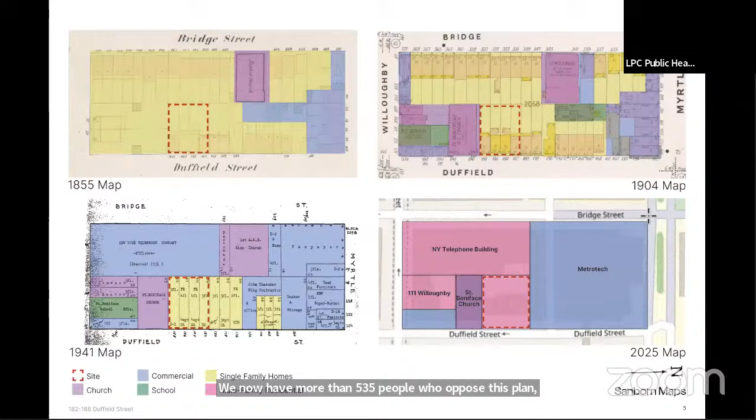The original preservation of these homes began at the behest of the community board at the time, which led to an agreement signed in 1988 between Metrotech developers, the city, and state, which stipulated, quote, the houses should be occupied for institutional, commercial, residential uses that are compatible with its physical and historical integrity and protected from future alteration or disturbance.

And now the community of downtown Brooklyn is demanding that these historic and irreplaceable Duffield townhomes be protected as intended when they were first deemed architecturally significant, saved from demolition in 1990, moved and preserved intact at considerable expense, and subsequently individually landmarked by this LPC in 2001.

Our three major objections are: the current plan violates the townhome's original landmark designation. In fact, it significantly alters the facade of 188, including the historic entryway, removing the stoop, destroys the rear portion and all the interior floor plans of the houses, rendering them mere Hollywood set facades, destroying any sense of their current landmark status as habitable, potentially habitable townhouses.

The plans as presented omit important engineering details surrounding how the developer would protect the townhouse's existing delicate original details in wood and brick structures during large-scale construction on a small lot with limited egress, without their complete and permanent destruction. The current plan does not honor the history of these homes, nor the reason for which they were saved in the first place: to commemorate the vibrant middle-class neighborhood of downtown Brooklyn and its rich historical importance in the development of 19th century Brooklyn.

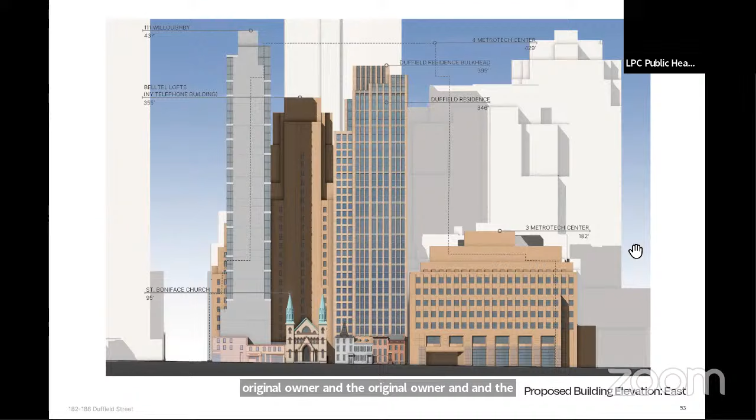That never happened. We're now here many years later with a couple of owners between the original owner and the current owner. But that was never filed. It was not only against that building, but nothing was ever filed against any of the buildings.

Landmark designation did happen. I did reach out to the SHPO and the law department. We talked through some of the issues, and based on all those conversations, since they weren't filed, it's very difficult, if not impossible, for us legally to enforce a restrictive covenant against 186.

The current owner would have to agree to it. More importantly, these are very old covenants. There was some question about how this project relates to those covenants in that project, but more importantly, landmark designation, which was identified as an equal avenue for preserving the buildings, did happen in 2001.

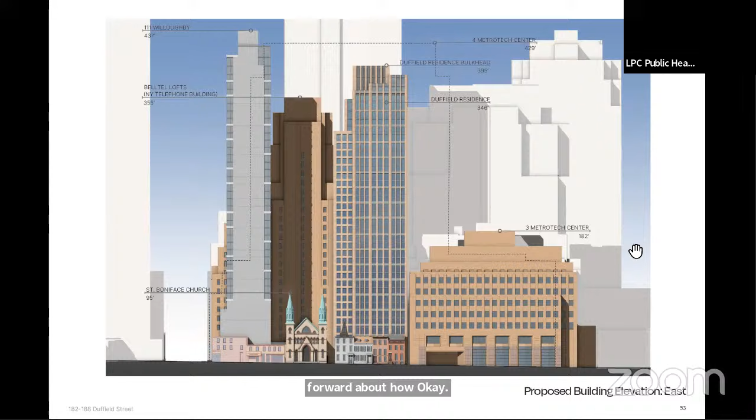And based on those conversations and where we are today, the landmarks preservation law is the one that we will be applying today and going forward about how to analyze the proposed changes to these buildings.

Thank you. Commissioners, do we have any final questions? Okay. Let's go ahead and close the hearing.

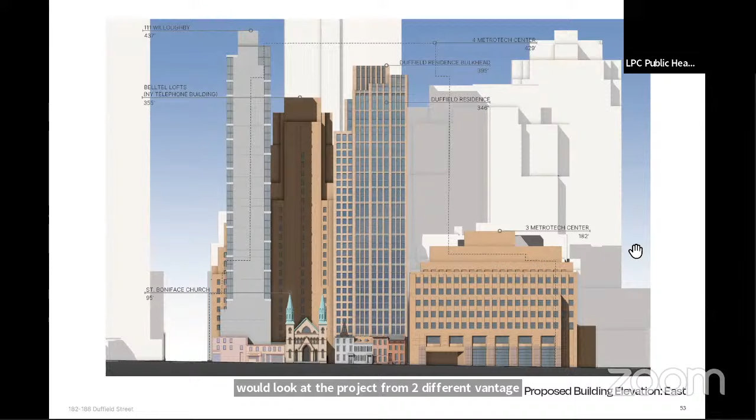I think the project has to be looked at from two different vantage points: from the vantage point of those precedents, and from the vantage point of what we do every single Tuesday with townhouses all over the city. And those are in districts, not even individually designated. To some extent, well, let me go back.

In terms of the precedents, they showed I think 4 precedents: the Coty Building on Fifth Avenue with the KPF Tower behind it, the Fifth Avenue Madison Square area building, the Greenwich Street building, and the 14th Street BKSK project. I don't think any of these are relevant to this case. I think in all 4 of those cases, the buildings were sited on a corner, and in 3 out of the 4, the large buildings were set back significantly enough so that either they didn't touch the building, or they left the reading of the volume of the building significantly intact.

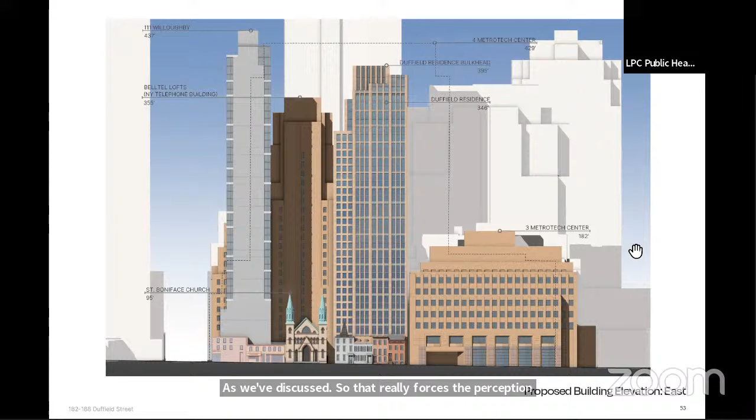Because this site is a mid-block site where the historic buildings are already bracketed on either side by buildings that are taller and behind, they sit in a hole in the city, a significant dark hole. And they are viewed relatively frontally because the buildings to either side are closer to the street, as we've discussed. So that really forces the perception of this project to be frontal, and there's no question that the frontal reading of this proposed volume would completely overwhelm the historic buildings. I just don't see a way around it.

Another concern I personally have, that I raised at the time with the 14th Street buildings, which I think every time I walk by it, I think I was right, but that's probably something a lot of people do, is I think there's a typology to how the city is built. The city is built primarily as blocks with buildings on the edges and a hole in the middle, and that keeps the mass of most buildings to the edges, to the perimeter. When you plunk a tall building in the middle of a block behind other buildings, like the 14th Street one, I think it just looks wrong.

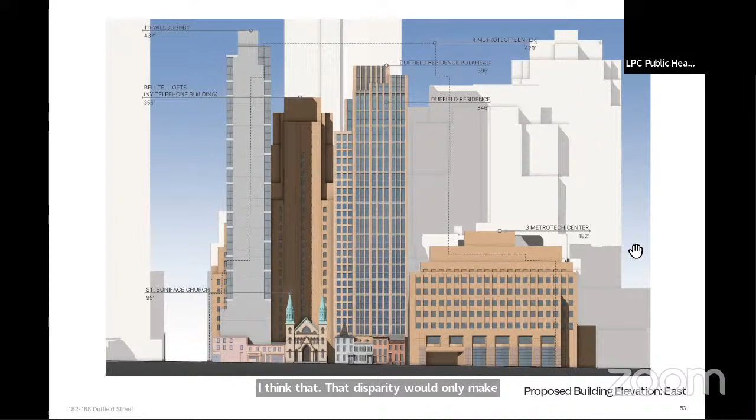I think it looks wrong from an urban development pattern. And I think this would look similarly out of place, even on what is actually a quite small block that's not typical of New York's kind of grid. I think that disparity would only make it more noticeable. So I think the volume of this building is way too close to the street and overwhelms the historic buildings.

I think from the vantage point of individual landmarks, if the precedents don't hold up, then you have to look at what else we normally do with buildings of this scale. And the answer is we make people crazy to get rid of the visibility of the top of a roof. This is a notably visible rooftop addition on 4 historic buildings, to the extent that the real analogies don't hold up here. I mean, you can think of other analogies, but this just doesn't hold up in terms of the precedents. So I don't think it's an appropriate solution.

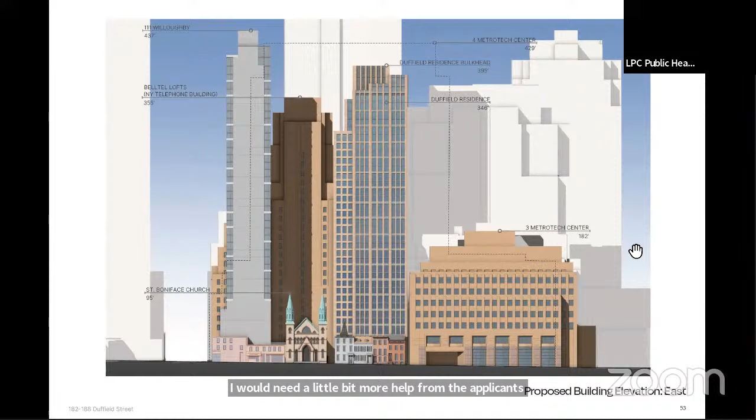Furthermore, not that it's necessarily relevant to our deliberations, but I found the applicant's answer to the question about why you couldn't redevelop these at a lower scale completely unsatisfying. The fact that 10 years passed and nobody did it—there's all kinds of reasons why that could have happened that have nothing to do with the intrinsic value of these buildings as potentially sellable real estate. So I think I would need a little bit more help from the applicants to understand why this Hail Mary desperate affair must be the only way to develop these properties and save them.

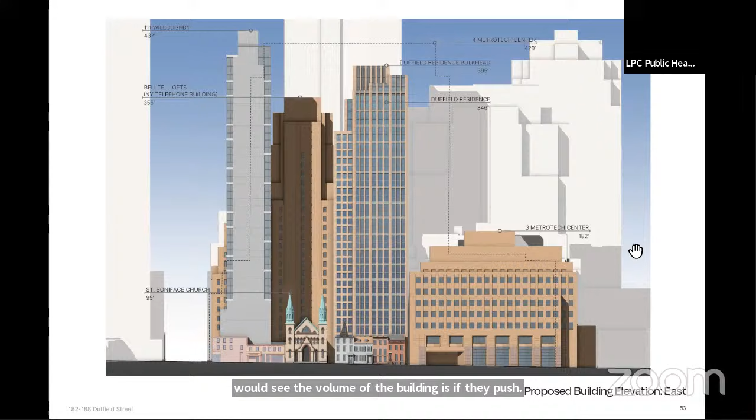The only way you would see the volume of the building is if they pushed the historic building up front, and when you went inside you saw the back view of the building. That also seems odd, that you would penetrate a building to see the back of another building. So the manipulation of the historic building in relationship to the tower needs to be rethought.

Thank you. Commissioner Chu?

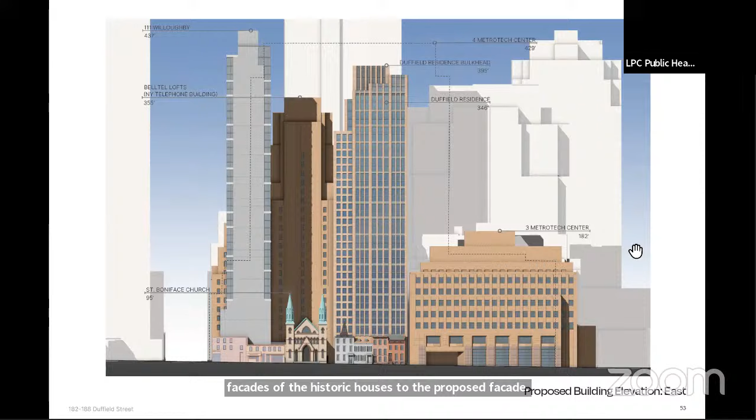I'm in agreement with my fellow commissioners' comments. I do think Michael's comment about the frontal reading of this combination of structures, the historic and the proposed, is really significant, because the proximity of the facades of the historic houses to the proposed facade means it doesn't read like a building behind. It reads literally, as Michael put it, as an addition on top.

In fact, in the section, it shows the addition coming up over the houses. That is not something we would ever really entertain, only in special conditions would we ever see that. But this is a case where the addition is in fact 20 times more than the actual existing fabric.

I also wanted to echo Everardo's comment that it's a very unique site. It has a history of many changes in zoning, which make it an unusual property to propose a solution onto. I recognize that as a challenge, but as an existing property that has had the historic houses specifically protected and moved here to be saved, any solution needs to celebrate those houses and work with them in a way that makes the proposal and existing fabric a win-win. Unfortunately, that's not what I'm seeing in this proposal.

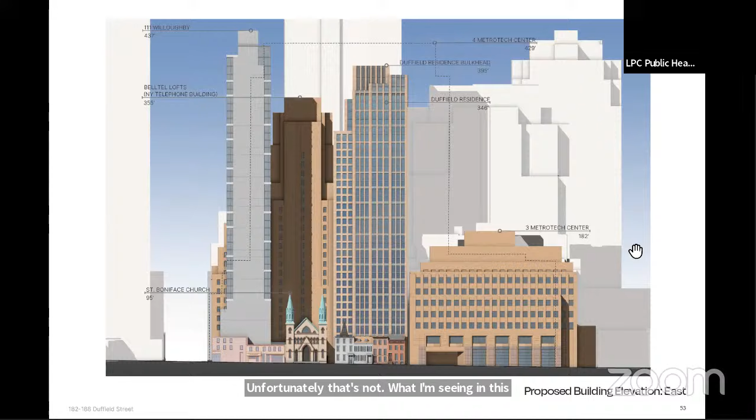The houses are diminished severely in scale with the proximity of the tall tower. There's so much demolition it's hard to tell what is left of the fabric of those houses. The rear is being removed, the roof is being rebuilt to be fireproof, many of the floors are being taken out and re-put in, and party walls are being affected, which are really the structural walls of the houses.

The front and back facades are freestanding. Those could theoretically be protected, but there are also revisions to the front facade as well. There's just too much, and at the end, too little left of what was to be protected on the site. I'm finding the proposal difficult to find appropriate at this point, as it is proposed.

Thank you. Commissioner Ikumbe?

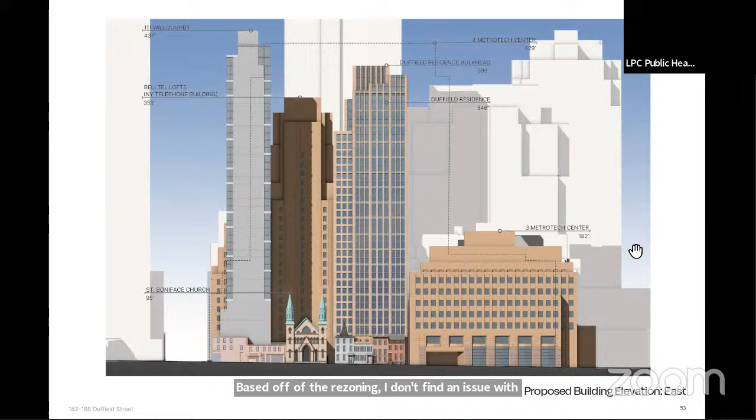Based off of the rezoning, I don't find an issue with the tower. The issue I'm actually having is that the tower trumps the landmark site, and it's kind of eating it, more or less. It pulls away its importance. I think we should recall its importance, given it was actually preserved once before and moved in the 90s, and find that to be a relevant portion of this site.

What's being proposed alters the existing landmark properties immensely, and it eats away at it. I appreciate the attempt to preserve as much of the front-facing facades, but I think that might actually be one of the easier things to do.

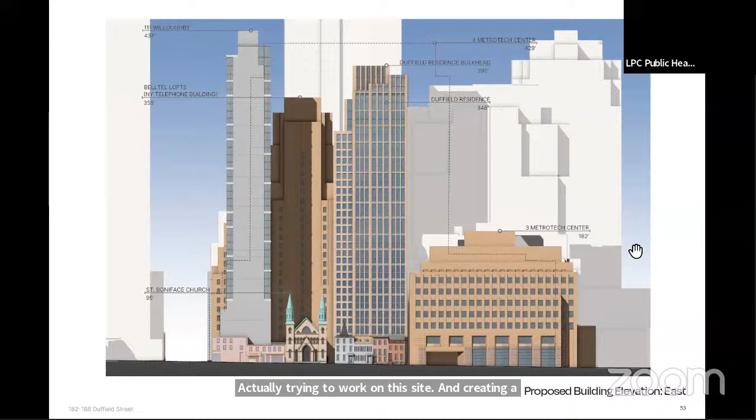Actually trying to work on this site and create a final product that seamlessly puts together all the wants in the basket is extremely difficult on this site. What makes it even more difficult is that the landmark buildings have to be put in the forefront, because that's why we're here in the first place. So I find the extremely high alteration of the existing properties to be inappropriate.

Thank you. Commissioner Wilder? Thank you. So...

The first thing I looked at when I started looking at the project was the 188 Duffield entrance. Just before going inside or looking at it, I wondered why this was changed—what was the reason? Obviously, I'm thinking about ADA access.

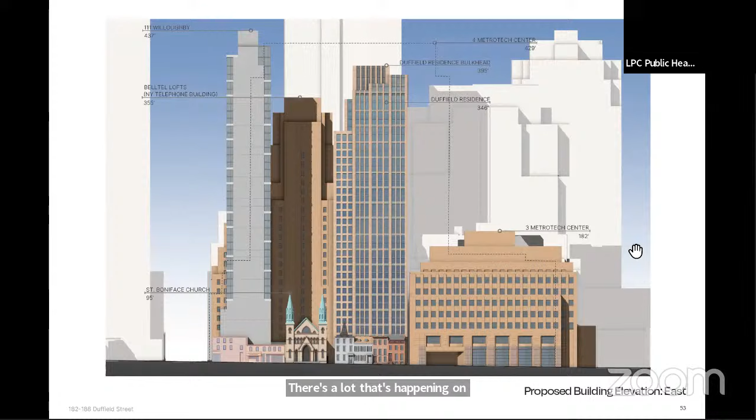But then once you start unraveling and looking into all the decisions made to accommodate this, there's a lot happening on the interior that subconsciously tells you this building is losing a lot of its history to make something work.

And that something ends up being this tower, which, as has been said, takes the lead in this project and becomes the priority versus the four buildings being the priority. And I think overall that starts to become the theme, which makes it difficult to say that you're preserving this building. Again, I probably don't have an issue with the tower as a separate entity.

And I looked at it and thought, well, what happens if we pulled the buildings forward, which was discussed and also shown in the appendix. But then I think the essence of these homes is the fact that they are set back, and they create this unique feel in a very dense area.

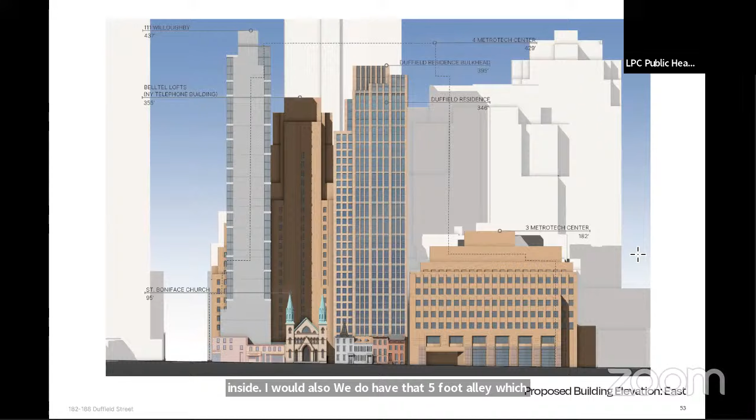So what's the next thing to consider? Should the front wall of the tower be pushed back to maybe empower the townhouses in a sense? I think overall there needs to be more work to find that balance, because at the moment there's too much happening inside. We do have that five-foot alley, which could also be used as some sort of entrance to address the ADA, so we don't have to change that facade as much if we're getting into the weeds. But I think there's too much happening to be able to find this appropriate.

Thank you. Commissioner Ginsberg? Yeah, so when I started looking at this and went and visited the site, I want to be supportive of housing because we need more housing. And it's a very strange environment where these three-story buildings are surrounded by really tall towers, which is not at all what their original environment was.

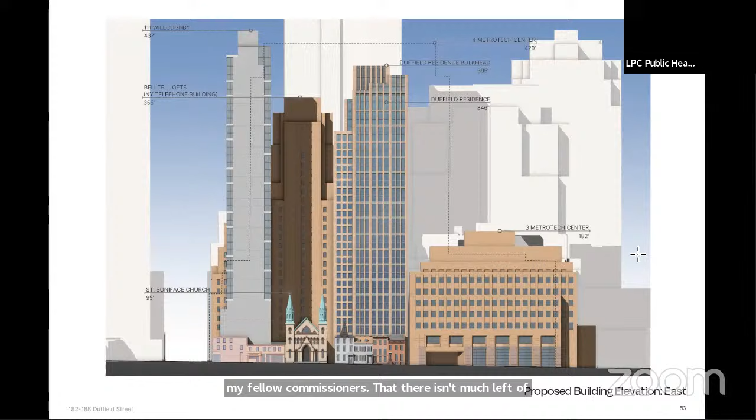But I have to agree with my fellow commissioners that there isn't much left of these buildings, of the historic fabric, et cetera. That is why they were landmarked and why they were moved and preserved. I'm not sure it's possible to build the tower and do that, but this doesn't. So sadly, even though I'd love to see the housing work, I can't find this appropriate.

Thank you. Commissioner Mahan?

So I'd like to begin, first of all, by thanking the applicant team for their ambition. I'd like to thank them for coming up with a creative way to activate some landmarks that are in a very challenging condition. This is a challenging context. And I think a lot of people here want to see development, want to see the production of housing. Many of us are not afraid of height.

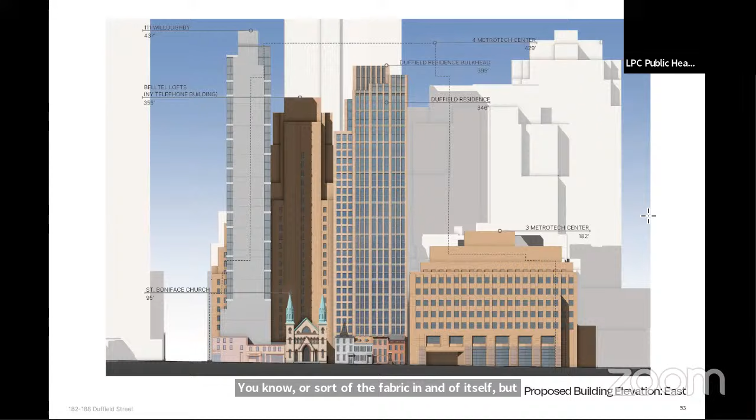So that being said, for me, this is not so much about the rear facade or the fabric in and of itself, but rather the relationship of the buildings to the surroundings. And I think the commission regulates the spatial relationships, the negative space, just as much as the thing itself, and that gives the landmarked buildings meaning. So when these buildings were moved, careful consideration was given to their relationship to the lot lines and surrounding buildings. They were carefully set back from the street as they were. They have a rear lot as they did originally.

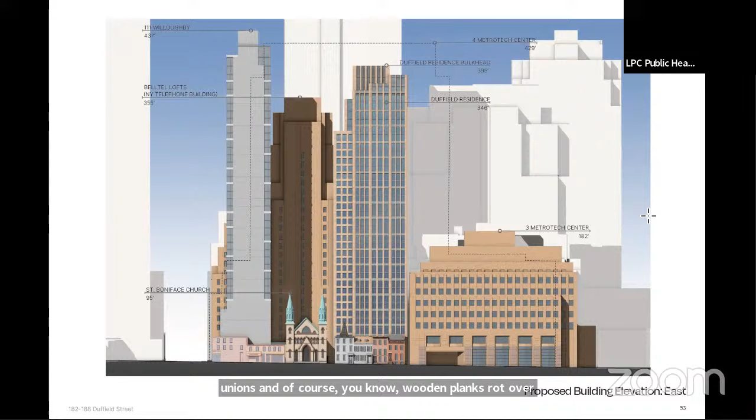So anyway, this was very thought-provoking. I don't know if this is a bit much, but thinking about the change these particular buildings went through over time, and the additional change proposed here, it made me think analogously of Theseus's paradox, where a ship is sailed every year by the Athenians, and wooden planks rot over time and are replaced one by one. Eventually all of the planks of the ship are replaced. Is it still the same ship? The interesting question in this case is, if you were to say no, at what point did it stop being the same ship?

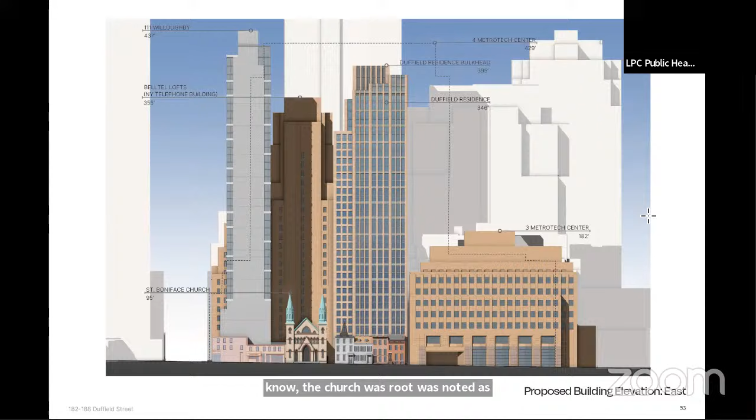So these buildings have been moved. They've been switched around in their order. Their relationship to the surrounding site is proposed to be changed. Their volumetric integrity is proposed to be changed. And I think that would just cause the landmarks to lose meaning as landmarks. Getting back to Theseus, I don't know if I could tell you at which step the buildings would lose their status as landmarks, but it's kind of a know-it-when-you-see-it condition. I think it's too much, but for me it's the relationship of the landmarks to their context. Even the relationship to lower scale, the church was noted as significant. So it seems those spatial, contextual, scale, proportion relationships are of critical importance and would be obliterated by this proposal.

Thank you, Commissioner Chen. Yeah, not to rehash, I think my fellow commissioners have said it all.

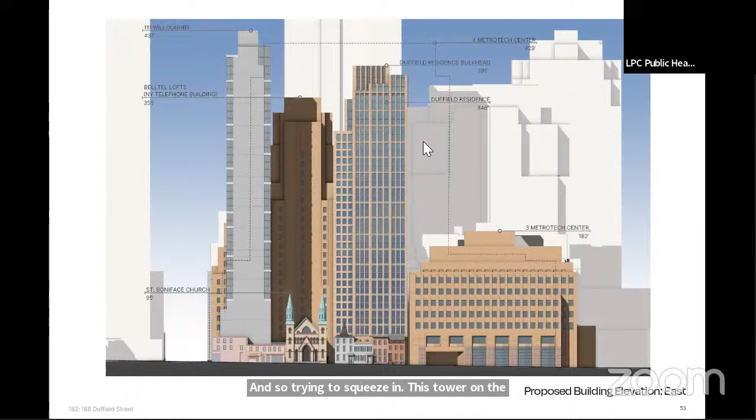I think it is a very challenging site. It is shallow, and the historic buildings are set back. So trying to squeeze in this tower on the back, I think the commissioners are rightly pointing out that, in the process of trying to achieve that, the interiors, the party walls, the height, the ADA access, all of these get modified. I think this proposal remains unresolved.

Thank you. So I think we're going to take no action today. It looks like most of the commissioners had problems with the level of historic fabric that was being removed. Some commissioners were supportive of housing the towers. Some commissioners felt that it was too tall. There was a problem with the relationship to the individual landmarked houses. But I think we may have to go back and rethink this proposal.

But thank you. Right, and the staff will be out to speak with you afterwards and think through next steps.

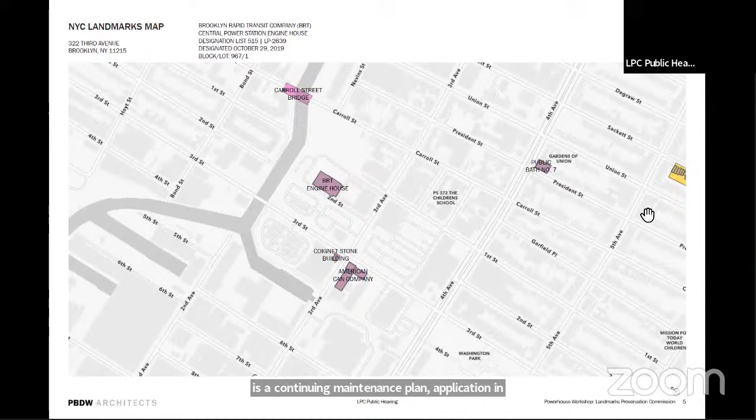We want to focus on—Bridget will go through all of the preservation components. I just wanted to make a couple of quick notes. So this is a continuing maintenance plan application in conjunction with a transfer of development rights proposal. It's also important to note that the building was landmarked after we pulled the initial permits for the building, so we had already planned for a whole variety of preservation components to the project even prior to its becoming a landmark. I'm going to hand it back to Bridget to walk through the project itself.

It's important to understand the project that we completed in order to set the stage for the continuing maintenance plan, because the building is already in excellent condition.

Our project team consisted of Herzog and de Meuron leading the design, and then PBDW architects. We were the preservation architect and executive architect working with Powerhouse Arts.

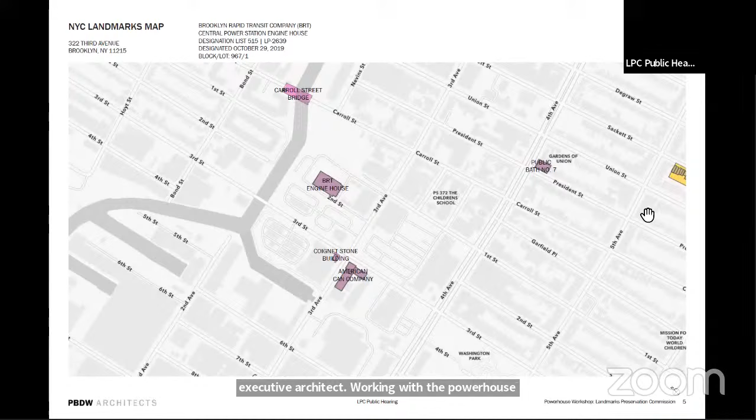The building here you see on the landmarks map from the landmarking. It's situated along the Gowanus Canal. It is visible along the Gowanus Waterfront Park and from the landmarked Carroll Street Bridge, the primary facade that faces the canal. There are multiple other landmarks, industrial landmarks, scattered throughout the area, but this is not a landmark district.

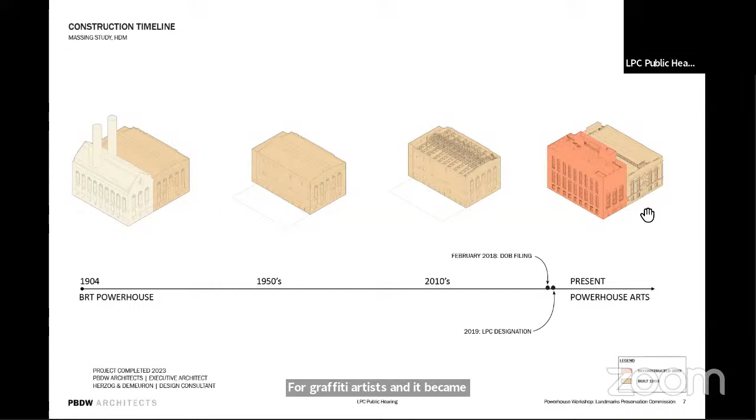It's important to understand the changes over time of the building to understand what is landmarked. On the left in 1904, we have the full complex of the boiler house and the turbine hall. As electrification and technology changed, the boiler house became obsolete and was later demolished. By 1950, the turbine hall that remained took on a new use as a recycling plant. Later it was no longer used for that, and it became abandoned. In the 2000s, it became occupied and became housing for graffiti artists, known at that time as the Bat Cave. These are culturally significant items in the important history of the building.

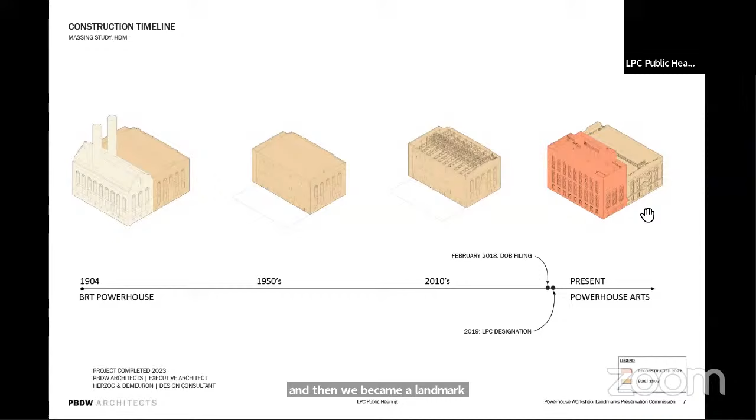In 2013, Powerhouse Arts took ownership of the building and began site remediation for several years. Our design team began in 2016 and continued until 2023. We filed the Department of Building drawings in 2018, construction had started, and then we became a landmark. It was the three exterior facades of the turbine hall that remained—not the wall shared with the original boiler house on the north, but the other three walls. Those exterior facades are what are included in the landmark.

As Paul said, the project effort always was to preserve the interior and exterior as the goal of the project. So it was a forward-thinking approach—it was before the landmarking occurred.

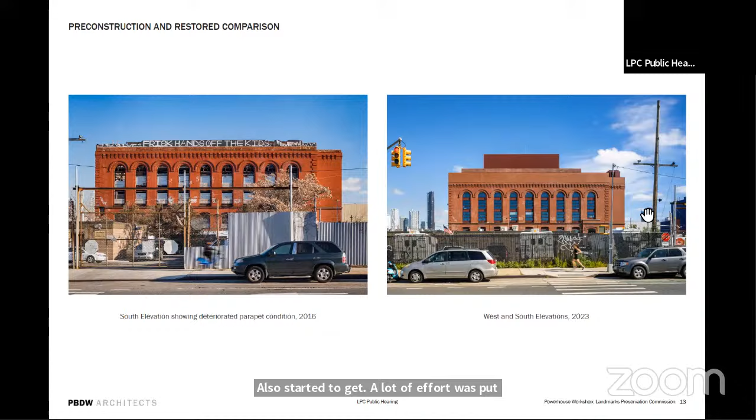Here are pictures before and after of the three facades. I'll go one by one. You can see that neighboring development also started, and a lot of effort was put into improvements along adjacent properties after this project was completed. So we have a before and after, and one more, so you can see the scope of our restoration work.

Also, the original spandrel panels were recreated in the windows.

Once the restoration is complete, now that we have this excellent condition, we have a continuous maintenance plan to delineate how Powerhouse Arts will perform their cyclical maintenance and prevent deterioration, to protect the landmark's long-term care. So we have divided our continuing maintenance plan into five components.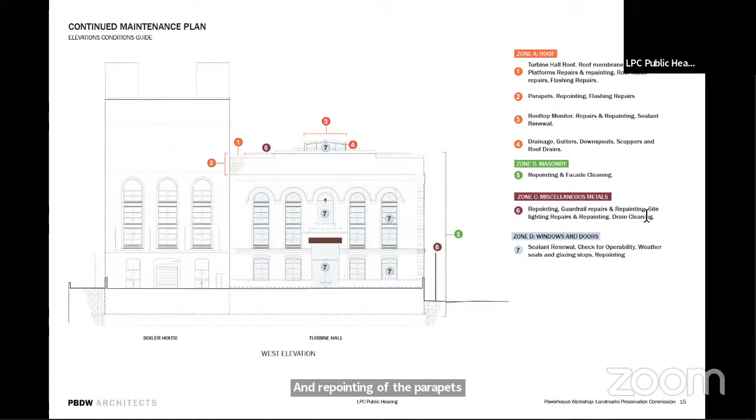We have the roof, where we've prescribed how the parapets and repointing of the parapets, flashing repairs, roof sealants, and checking of all the drainage, gutters, and downspouts will be done. We have the masonry, where we have periodic repointing and gentle facade cleaning. And then the miscellaneous metals section, where we're preventing corrosion, always stripping, priming, and painting where needed.

And then windows and door openings throughout the building—the operable windows need to be checked for performance, and their sealants need to be replaced over time, and repainting maintained. The final component of the continuing maintenance plan is the mechanical system that needs to be maintained on the boiler house. There's one system shared between the two buildings, which is why it's labeled over on the boiler house. Everything else is over on the turbine hall and on the exterior facade.

In conclusion, the powerhouse's journey from industrial powerhouse to cultural powerhouse captures over a century of Brooklyn's creative and working history. The purpose of this continuing maintenance plan is to establish clear standards for preservation and maintenance of the masonry, metals, and materials, so that they are preserved with the same care that went into their original making. This plan ensures that the character, craft, and creative spirit endure well into the future.

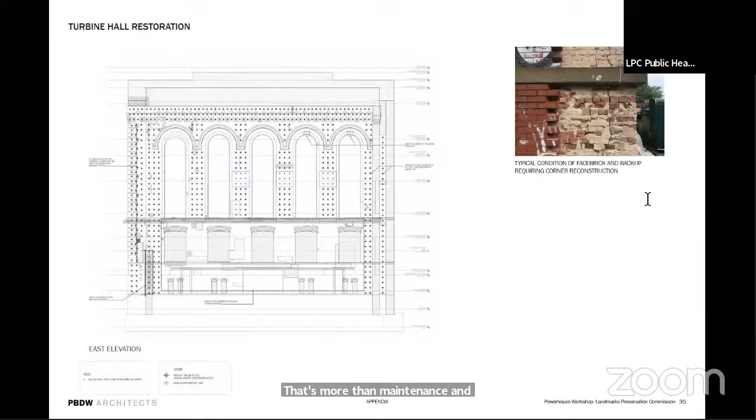How does the plan differ from the agreement, and what kind of things, I assume that the agreement is not a required thing, but the plan is a required thing? Well, the agreement is required. The plan is really addressing the work being done in the building, more than maintenance and repairs that have been done on the landmark. The agreement goes in, it's more like a restrictive declaration in that it spells out funds have to be put into the maintenance, and there needs to be inspections.

And that's going to be required of all of these transfer of development rights? Yes. Beautiful, thanks. Here's the plan itself. I didn't put it up, it's here in the appendix of the presentation, but it goes through each of the requirements that are being asked of each of the material zones.

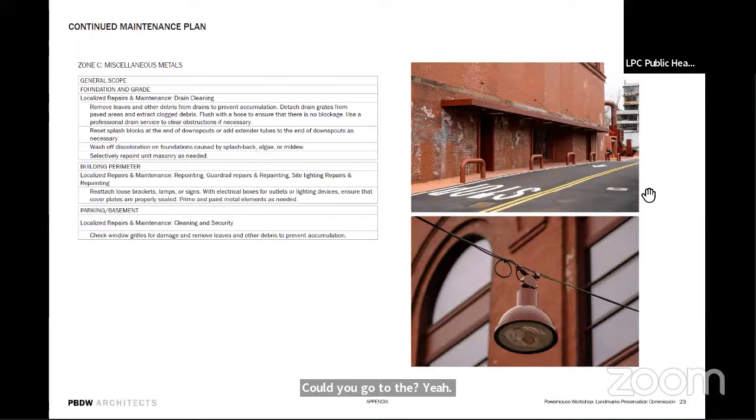Could you go to the? Okay, Commissioner Jefferson? Well, these development rights, are they for across the street, down a block, or can they go 10 blocks over or 50 blocks over? Well, in this case, I think the applicant can explain. It's basically going next door, but it will vary with each application they can review, but it's very limited.

They're within, but there are two types of air rights, right? There's one where you have to do it near the building, then there's one where you could go 10 blocks away. Well, under this zoning resolution, they can't go 10 blocks away, but they can go onto the neighboring street frontage of this building block. So it's within a close proximity to the landmark site.

Oh, thank you. Commissioner, go ahead. This is technically across the street because Second Street is a mapped street, so we share half of the street with the new development site.

Commissioner Chu? Can you go back to the maintenance actual program, because that's what we're looking at. I just wanted to, the one thing, and this sounds all pretty straightforward, I greatly appreciate the intent to retain the artwork on the interior of the building, which is something you guys personally decided to do, and we talked briefly about this on site. What is your attitude about the exterior graffiti? What is there that you're protecting, and anything that doesn't get tagged tomorrow, is that now going to be cleaned, or how can we understand that maintenance?

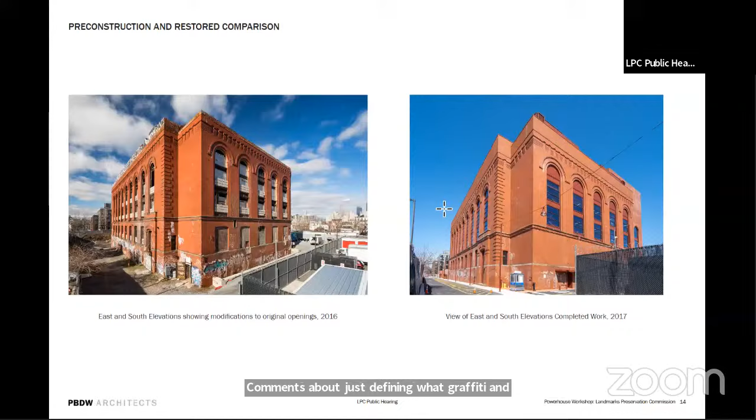Thank you. Commissioner Ginsburg? So I, with some of my fellow commissioners, visited the powerhouse. It's an amazing project that was done so thoughtfully. And I agree with Commissioner Chu's comments about defining what graffiti to keep and maintain, or let it fade over time, which I think makes a lot of sense. But it's great that you'll be able to generate money from the transfer of air rights to maintain the building. Thank you.

Commissioner Mahan? I agree with my fellow commissioners.

Thank you. Commissioner Chen? I'm glad that Stephen mentioned what graffiti to keep in, because it's hard to tell the new one from the old one. I'm also interested from general counsel, have we ever done this before with any building in Long Island City or any other place like this, in terms of dealing with graffiti preservation? Not that I'm aware of. And also, just to note, we normally do not issue violations for graffiti in most cases. There was a bank building downtown where they made a big deal about keeping the graffiti - that is the one example, and in that case the commission was comfortable and approved that graffiti staying on the building.

Commissioner Goldblum? I think it's great. Thank you. Commissioner Jefferson? It's a beautiful building.

So Commissioner Chu, do you want to make the motion and perhaps add something about having a statement addressing exterior graffiti? Sure, yes.

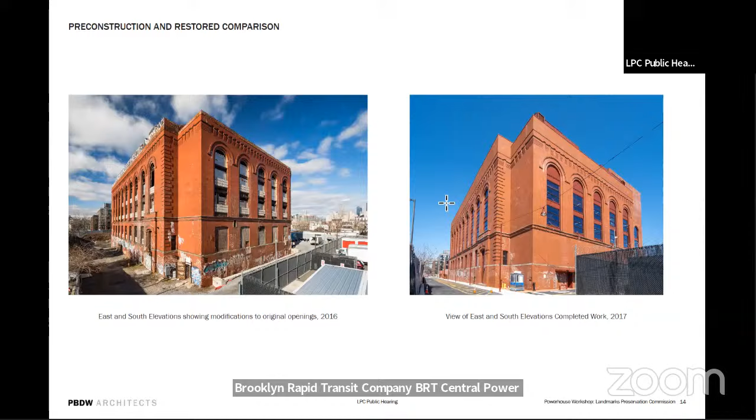In the case of LPC 01465, 322 3rd Avenue, also known as 153 2nd Street and 340 3rd Avenue, Brooklyn Rapid Transit Company, BRT Central Power Station Engine House. It's an individual landmark, a classical Romanesque revival-style power station designed by Thomas Murray and built in 1901-4, altered and combined with the new annex building designed by Herzog and de Meuron, built in 2022. The application is to request that the Landmarks Preservation Commission issue a favorable report to the City Planning Commission regarding the continuing maintenance program for the landmark in connection with the transfer of development rights pursuant to Section 7542 of the zoning resolution.

I recommend approval, finding that the ongoing commission-approved restorative work has reinforced the special architectural and historic character of the building and site, that the restorative work has addressed significant longstanding structural issues and other preservation issues, and has aided in the long-term preservation of the building, that the implementation of a cyclical maintenance program will ensure the continued maintenance and preservation of the building and site and will support the adaptive reuse of this long-vacant former power plant as an art center.

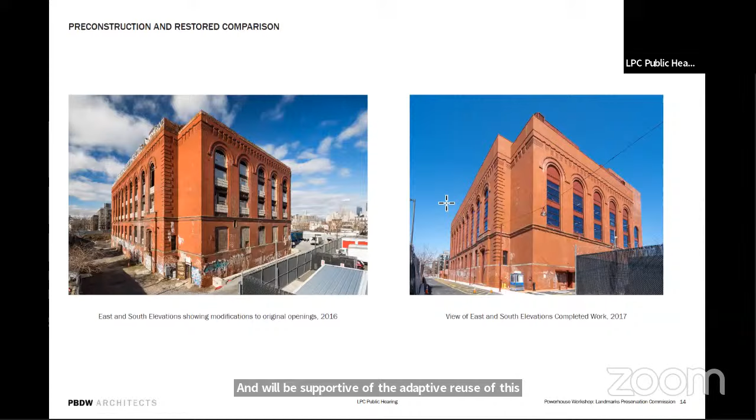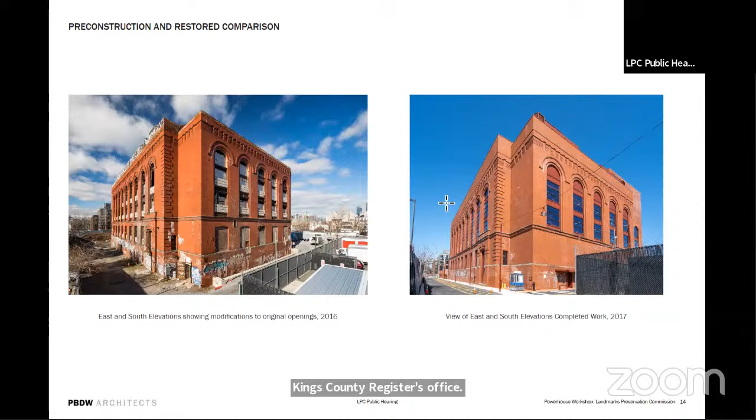That a positive report will facilitate the future transfer of air rights from this individual landmark pursuant to various provisions of the zoning resolution, which requires such a maintenance program as a condition of a transfer, that the owners have committed to establishing a perpetual cyclical maintenance program legally enforceable by the LPC under a continuing maintenance agreement binding all heirs, successors, and assigns, recorded at the Kings County Register's Office, and requiring that 10% of gross proceeds of each transfer of development rights be deposited into a fund dedicated to supporting the cyclical maintenance program.

And finally, the applicant will provide a detailed description of intent for existing graffiti on the 3 historic facades, including identification of the graffiti artwork they would like to retain, and an approach for how it would be retained on the building's masonry facade as part of this plan.

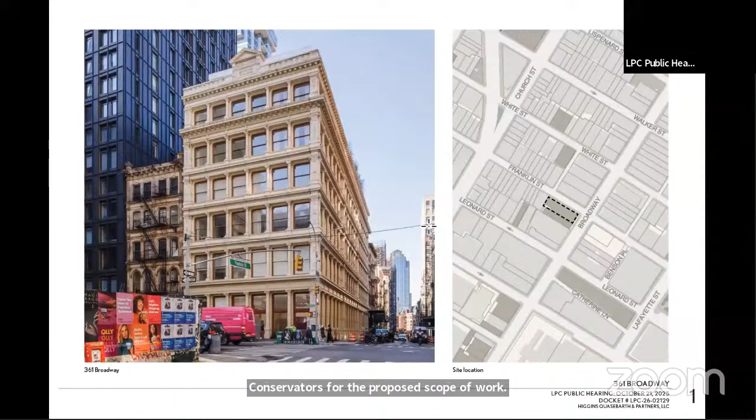I'm going to take you through the presentation, and the full team is here to answer any questions. As Corey mentioned, this is another application to establish a continuing maintenance program under the new Section 7542 of the zoning resolution, and the application is for 361 Broadway.

It's a 6-story cast iron building constructed in 1881-82, designed by William Wheeler Smith, the James White building, located on the southwest corner of Broadway and Franklin Streets, just outside of the Tribeca East Historic District. So the building is not within the district, but it's surrounded to the west and north by the district.

As we mentioned, this is a transfer of development rights under 7542, a new tool developed under the City of Yes for Housing that allows greater flexibility for individual landmark owners in terms of where they can transfer undeveloped air rights, easing the process by which it can be transferred, all to facilitate greater housing opportunity. And that is how it will be used here.

The receiving site is directly across the street from 361 Broadway at 65 Franklin Street, the southeast corner of Broadway and Franklin. There are about 25,000 square feet being transferred to the development site, leaving about 1,000 at the building itself. That will be a new residential development currently moving forward at City Planning.

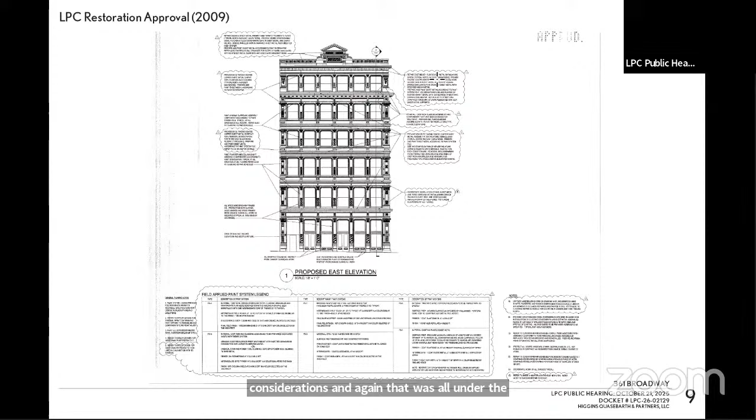This is the completed project once the adaptive reuse was undertaken. With the restoration complete around 2012, the project came forward with a residential conversion project designed by Shigeru Ban, and as part of that, a 2-story rooftop addition was approved. This is one of the more notable visible rooftop additions that the commission has approved on an individual landmark. Part of what we're seeing here is the addition itself.

Then as part of the facade condition, once the cast iron was stabilized, the new windows and all of the infill was addressed as part of the adaptive reuse. So the full scope of restoration included that extensive cast iron restoration, replacement of all of the wood windows on the upper floors with new wood windows to match the historic. The ground floor infill was mostly original, and that was restored and maintained in the ground floor windows and storefronts.

Along Franklin Street, the existing diamond plate was removed and cast iron vault lights were recreated along the 165-foot stretch of Franklin Street. All of the stairs to the building, the steps up to the ground floor, were replaced with new vault light steps and railings.

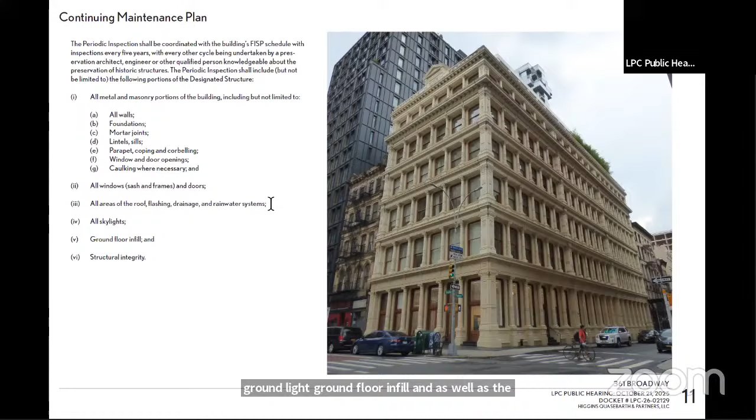Under the agreement, it would cover all facade conditions, all metal and masonry parts of the building, all windows including sash, frames and doors, and all roofing, drainage, and rainwater systems. Water is the enemy of cast iron. Also all skylights and ground floor infill, as well as the structural integrity of both the cast iron system and the overall building. A maintenance fund will also be established as part of this, and that's being worked out with counsel.

To see how this works: CANY undertook a survey of the building in September of this year. There's a comprehensive conditions assessment, which gives us the baseline conditions for understanding the existing conditions, but also a guideline for how to move forward.

That report establishes two categories of work: FISP-related work that addresses the safety and performance of the building, and then some things that are more landmarks maintenance related issues, such as aesthetic considerations and corrosion that's not detrimental to the underlying fabric.

Under this proposal, we will be cleaning the building and identifying all areas of corrosion, where it's related to either the cast iron or the fasteners, as seen in the photograph. This involves scraping, priming, and repainting the cast iron as needed where there is evidence of corrosion, and replacing all missing fasteners. Since this is an assembled system, fasteners are important, and that'll be a simple repair.

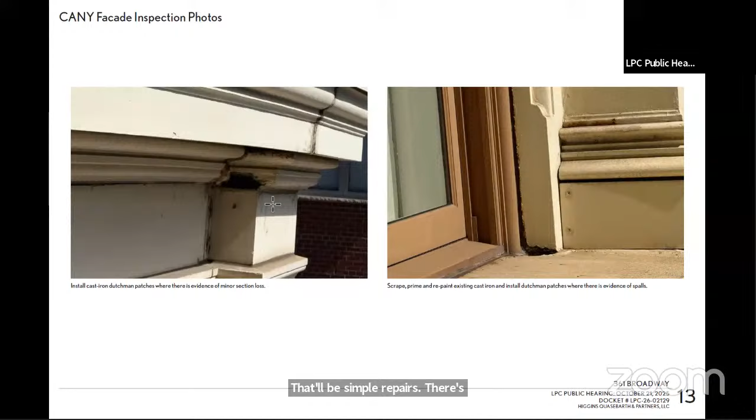There's evidence already of cast iron spalling and section loss, and those will be repaired with Dutchman repairs, then scraped, primed, and painted to match the historic finishes established under finish analysis.

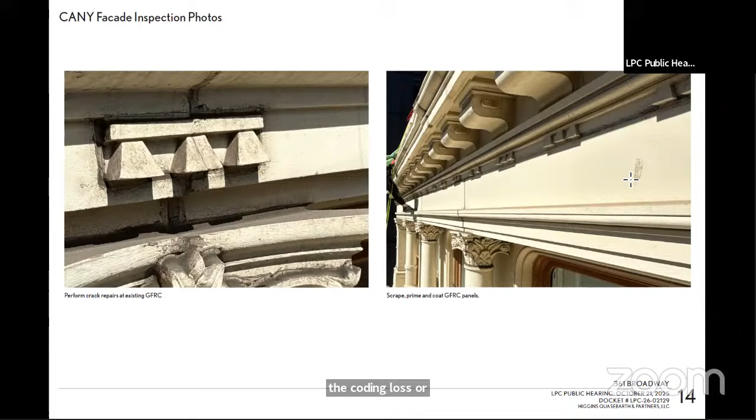The sections of GFRC were installed at the entablatures, bridging the cast iron above and below, and there's some evidence of cracks and repairs needed. This is a FISP-related item, not an aesthetic issue, so those cracks would be repaired as part of this. But there's also coating loss or blemishes in the finish that would be addressed, which falls into the category of LPC maintenance issues.

There's missing perimeter sealant around the windows. All of the windows were inspected, and where sealant is required, that will be replaced — that is a FISP-related issue. Then there's repairing open solder joints. There's sheet metal cladding over each of the projecting elements in the facade system, so where breaks exist in the sheet metal systems, those will be repaired.

For some reason, there's exposed waterproofing that was never removed as part of the original project. This is purely an aesthetic issue, and all of that will be surveyed, removed, and repaired. The underlying material will be repaired as part of that.

So this establishes those two categories of work: those that are typical FISP-related aspects of the project, and then the more aesthetic considerations to maintain, with the goal of maintaining the restored condition of the building following the significant and comprehensive restoration that wrapped up 10 years ago.

And with that, I'm happy to answer any questions you might have. Great. Commissioner Ginsburg?

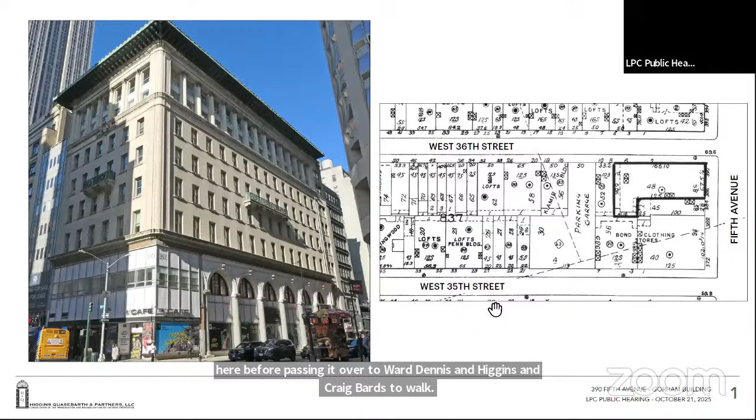This is the building here, 390 Fifth Avenue, the Gorham Building, on Fifth Avenue between West 35th Street and 36th Street. We are here seeking approval of a continuing maintenance agreement for the building in anticipation of a future transfer or transfers under the new City of Yes transfer mechanism under Section 7542. We do not currently have a receiving site. We do not currently have a deal. The building is in a 15 FAR district within the Fifth Avenue subdistrict of Midtown. There is about 87,000 square feet of unused development rights available to transfer. We anticipate the full amount would not be transferred in a single instance, but we're preemptively setting up the framework to allow these transfers to occur from this building in the future.

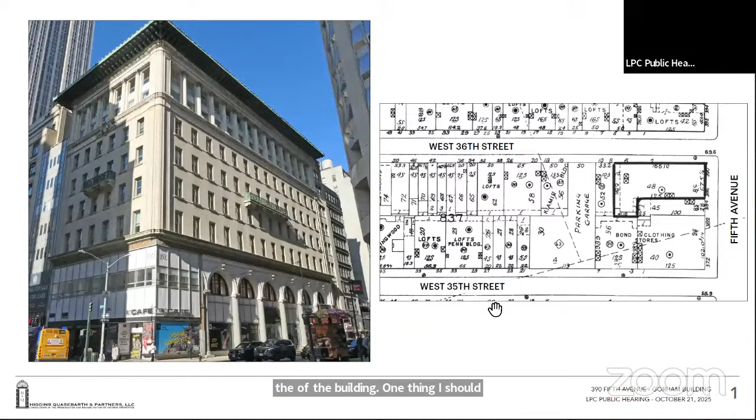One thing I should note preemptively before I pass it on: the building, prior to being landmarked, had a significant renovation at the ground floor and second floor in the 1960s, replacing the original condition with the condition seen on the screen. This space is currently leased—the corner space is leased for the next 15 years. So the current proposal under this continuing maintenance program would not alter the character of the storefronts to restore to the original condition. I just wanted to put that out there up front. I know that's going to be a point of discussion as this moves forward. So with that, I will pass it to Ward.

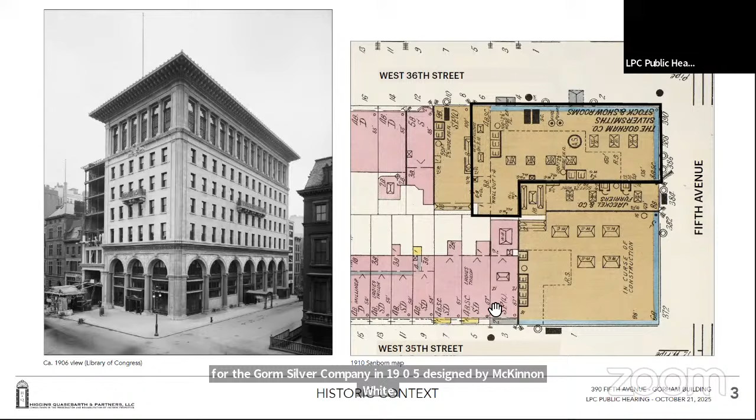Thank you, Nick. Good afternoon, Commissioners. Ward Dennis with Higgins Quasebarth and Partners. So the Gorham building, seen here, is an 8-story Florentine Palazzo-style building constructed for the Gorham Silver Company in 1905, designed by McKim, Mead and White. You can see it has a 2-story, or it had a 2-story arcaded base, a 4-story planar limestone midsection, and then a 2-story loggia at the top. You will also see on the far right in this photo a small building—that is an annex to this building.

These are original drawings from the McKim, Mead and White monograph showing the building and the floor plan. Historically, it had 2 entries, one on 5th Avenue, one on West 36th Street, and then at the far west on West 36th Street was a freight entrance, with projecting storefronts that were bronze historically.

Some details from that 1906 photo: you can see at the top loggia there were historically bronze screens, or presumably bronze screens, at those windows. There is also a bronze frieze that runs right above the arcade of the base of the building. And within the spandrels of the arches, you can see that there were historically bas-relief sculptures. And then you can also see the 2 historic main entries to the building.

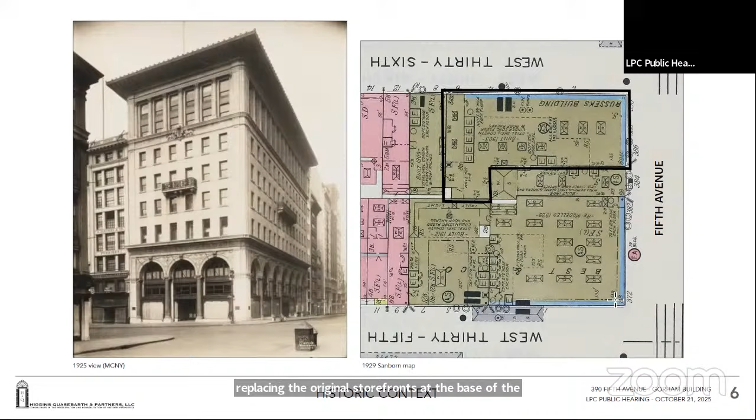Gorham Silver Company moved out of the building in the early 1920s, and it was taken over by Russeks, a ladies' apparel store. Russeks undertook a pretty extensive renovation of the building in 1923, which on the exterior included replacing the original storefronts at the base of the building and removing the screens at the top of the building.

Over time, Russeks expanded further. They actually expanded to the south and redid that building with an arcade to match, and they also enlarged the annex building you can see right here to a 10-story building.

Russeks moved out in 1949, and the lease was taken over by Sperry Securities. In 1960, Sperry undertook a modernization, in air quotes, of the building. At that time, on 5th Avenue and on the first bay at West 36th Street, they completely removed the stone arcade.

This is not something where they just covered stuff over. It was fully removed, and the new aluminum storefront was actually moved out slightly to the property line.

On 36th Street, they also removed the historic storefronts within the arched openings and installed new aluminum storefronts and solid panels at the spandrel level. And at the former freight entrance on the far right, they installed a double height polished marble and granite entrance surround for the building for the offices upstairs.

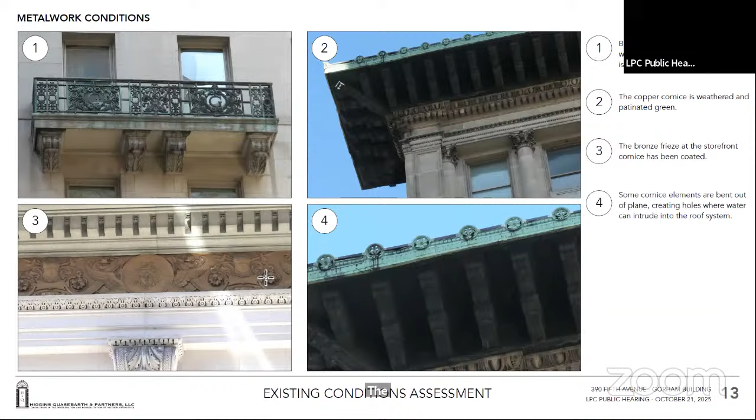The metal work on the building - the screens I mentioned were removed over a century ago, but there is some highly decorative metal work, including the two balconies, one on each facade, that are cast bronze. The cast bronze frieze you see at number 3 on the bottom left is above the second story, and then the copper cornice of the building projects out about 8 feet, so it is a very massive cornice.

You can see that there are some areas of damage and holes within the cornice. We also have documentation that the underside, the soffit of the cornice, historically had a polychrome or possibly gilded finish, so we will do a finishes investigation to see if we can uncover some of that.

At the second story level on 36th Street, there are surviving historic windows, both the frames, mullions, and sash within the arched openings. Those are definitely in need of restoration, including not just painting but also restoration for the wood and operation. And then at the base of the building, within the granite, the remaining granite piers and plinths have many areas of cracking and damage.

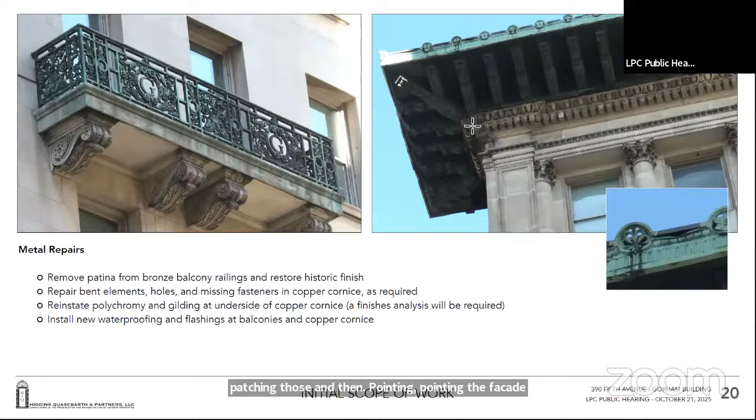At the metalwork, we will be removing the patination from the cast bronze balconies and restoring the historic finishes for those, which will also then control the staining that we're seeing coming off of those balconies.

As I mentioned, we will be doing a finishes investigation at the underside of the cornice to see if we can determine what that polychrome or other finish might have been, as well as doing sheet metal repairs to the cornice to put that into sound condition as well.

And at the base of the building, we will be removing old abandoned conduits and other attachments and replacing the marble panels on the 1960s portion of the facade.

And then finally, windows: all the upper floor windows will be inspected and given new sealants. Those are all replacement windows, but the windows at the second floor will be fully restored. We believe that the mullions we're looking at here are either bronze or iron, so we will inspect what those are, address the coatings, and then address the condition of the windows.

And then for the continuing maintenance plan, that will cover the areas that we went over in the initial restoration, as well as other areas.

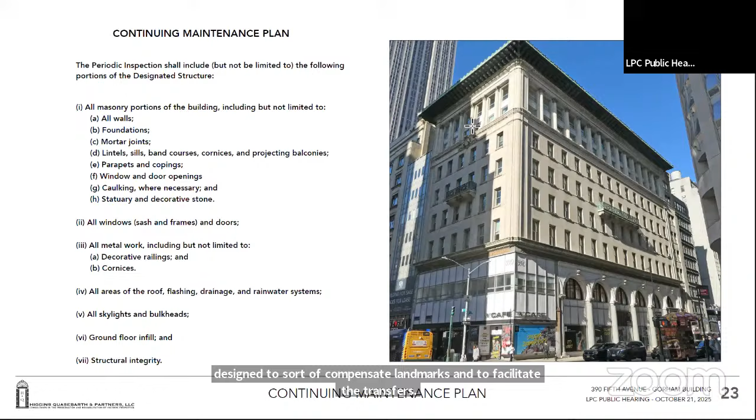And on top of that, this is under a new provision of the zoning resolution that's designed to compensate landmarks and facilitate the transfers. If you put too much restoration obligation, they'll choose not to transfer. Even if we weren't talking about a transfer here, at some point these storefronts will fail, and these people will come back to the commission under its everyday appropriateness question about what would be a better situation. This isn't a situation that will remain forever. It may change more quickly with required restoration, but these will fail and something better will be put in place. Will it be a restoration? Hard to say if that would ever happen.

Okay. Or would they just do the same thing? No, they have to come to us, we have to approve it. But it pre-existed? No, it doesn't matter, once it's worn out and they need to replace that storefront, they have to come back to us and we have to approve an appropriate replacement. Would it be permissible? It was pre-existing, but they can't just put it back again once it wears out. I mean, a new one, similar? No, they have to come to us and we would review it as an appropriateness application.

If we were to request that the applicants, as part of this maintenance agreement, provide a master plan for the storefronts, would that be enforceable? Would that carry over into situations where, say, one of the tenants on the side street vacates? Like we saw two weeks ago, a vacant storefront in this building, and the sob story was, 'there's nothing I can do, we know the building's ugly, but I'm just a little tenant.' If there were a master plan in place approved as part of this process, would that be something we could consider?

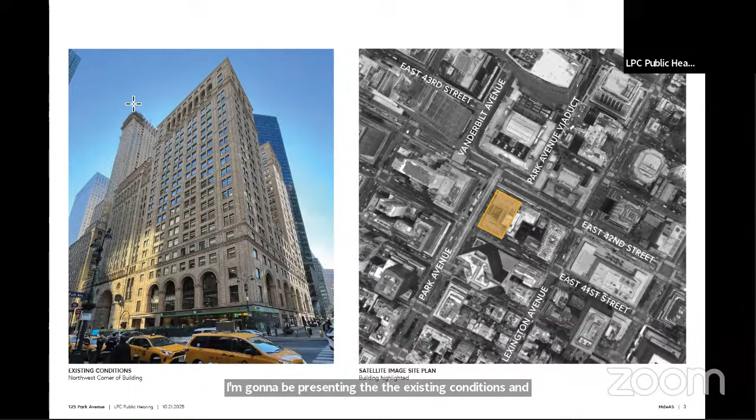I'm going to be presenting the existing conditions and historic background on the project, and Jeff will take you through the design. The proposal we're sharing today is part of an overall scope of work at the base of the building, primarily the building's lobby. It includes improvements to address tenant needs as part of this very large commercial building. The work has been detailed to be compatible with the historic material and detailing found on the building, and it's important to note the scope of the building entry we're proposing does not impact any historic fabric.

The Pershing Square Building is an individual landmark. It was designated in 2016, named for General John Pershing, commander of American troops serving in France during the First World War. The building, at 25 stories, was part of the Terminal City development, designed by John Sloan working with York and Sawyer, and completed in the 1920s, along with the Bowery Savings Bank designed by the same firm, a sister building directly to the east.

The building is prominently sited across from Grand Central Terminal and fronts onto Park Avenue as well as 42nd Street and 41st Street. It has 450 feet of frontage and over 500,000 square feet of office space. The scale of this building is important to note as part of this proposal.

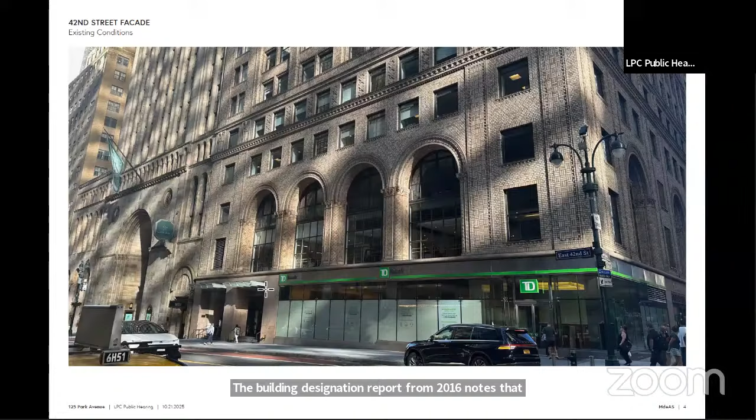The building's designation report from 2016 notes it's remarkable for its role in the history of the city's transit system, its history of development, and its exceptional terracotta cladding, all done by the Atlantic Terracotta Company. It's important to note that the designation report doesn't mention the building entry at all, and in the building description only notes the base. So in terms of relative significance for this 25-story building, the base is not really where the building draws its significance from.

Turning the corner onto Park Avenue, you can see the granite base running south, with non-historic infill at the corner that was installed about 10 years prior to designation. You can see the arcaded, monumental windows at the second floor, the light court fronting onto Park Avenue, and the overall scale of the building.

Turning the corner onto the 41st Street elevation, the detailing continues. The pink granite remains across the base of the building on that side with the bullnose, and then the tapestry of brick and terracotta above.

Turning to the existing entry representing the area of work - the infill here all dates to 2006, 10 years prior to designation. It includes veneer granite, frosted glass and metal canopy, bronze railings, and granite tile steps and landing. Within the landing are return walls, a soffit, and then glass swing doors and revolving doors inboard of that. These are a few additional details to give you a sense of the elements that make up the building entry at present.

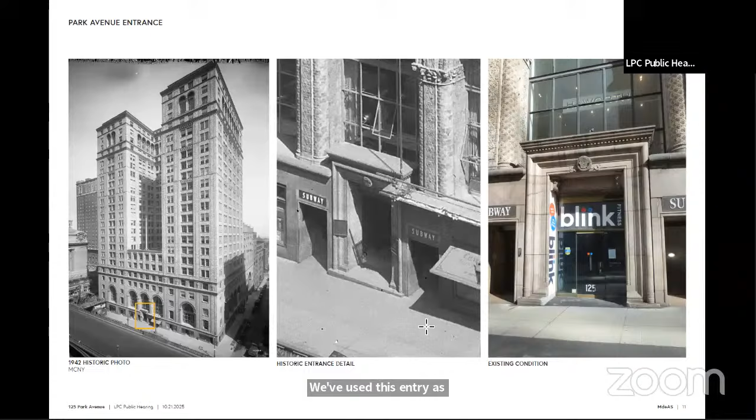the design on the 42nd Street entry. Interestingly, the building has had at least 3 different entry details. This was the original. This is a photograph from 1930, a few years after the building's completion.

Overall view on the left and a detail here on the right. You can see there was a similar sort of roll molding detail framing a single bay that served as the building entry for this very large scale building.

About 10 years later, that design was redone, and the enframement was done in what looks to be either granite or perhaps terracotta, with lanterns installed on either side with plaques identifying building name and some of the tenancy.

And then subsequent to that, the building entry as it exists today. We're not sure if there was an interim period between the early 21st century and the 1940s condition, but the condition here as it exists today serves the lobby, and you'll see an existing plan.

This is really sort of, there's an egress path out to 41st Street, but this really is the main lobby. There's an accessible entry here, an accessible ramp here, and steps leading up to the doors.

We know that the cladding has all been replaced except for the bullnose. That little thumbnail photo in the upper right just illustrates the mitered corners of the veneer cladding.

And you can see on the far left of the left photo this sort of roll molding or almost like a colonnette that was there historically that was replaced some time ago.

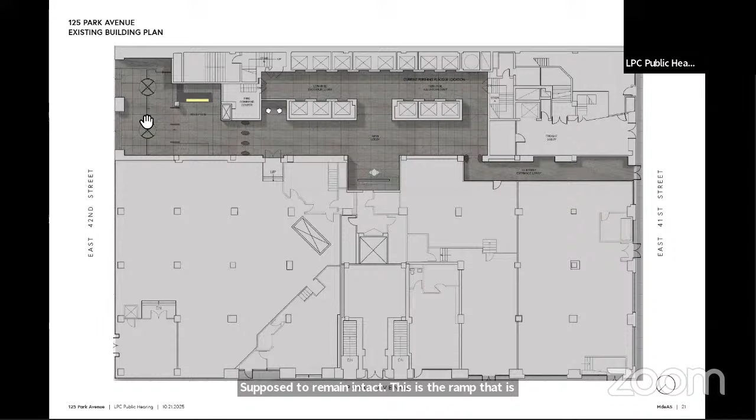So today, the storefront, the two revolving doors and swing doors, we propose to remain intact. This is the ramp that is snug up against the wall there. And the dark granite paving, we're proposing to replace with the lighter granite.

Expanding the stairs deeper into the space so it's a more gradual ascent to the lobby itself. Again, the storefront revolving doors remain intact. A simple comparison of the two here. The pathway to the back is really a loading and service corridor, so half of the building's egress is through this area, and all the tenants are moving through the front door.

Here on 42nd, a blow up of the existing entry and plan, and the proposed, again the ramp to the left here. The storefront remains intact, and it's really the replacement of the paving and reconfiguration of stairs at the front of the building. And then a reflected ceiling plan above that area.

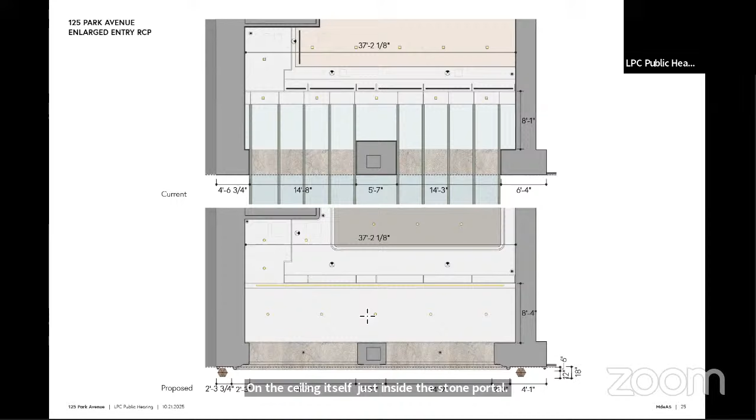On top here is the existing, with the metal and glass marquees, backlit glass underneath, just within the portal. And then the proposed, we reinstate the stone portal here with the roll molded perimeter, incorporate a cove light at the top of the existing storefront, which will graze the ceiling and provide a soft glow on the ceiling itself, just inside the stone portal. Small aperture downlight providing the illumination on the flooring just upon entry.

A comparison here of the elevation: on top, the existing, again the metal and glass marquee interrupting that band, and then down below here, the incorporation of the roll molded perimeter, and then bringing back that stone band that wraps the other two facades.

In the section on the left, the existing, we see the marquee, which is straddling the inside and outside of the building. Proposing to reinstate the granite band, the roll molded perimeter, and then you see the scale of the stairs today - there are 3 of them. They're right at the property line, very, very steep to negotiate as you approach the building, and instead incorporate a 4th stair and elongate the treads themselves for a better proportion.

A close-up of the existing today and the proposed, with those details noted.

Going back here, there are a few other elements. This is showing the proposed wall sconces and signage, which we'll get into next, along with some details on the stair profile and the railings themselves.

So 3 elements to note here. The original building entry had 2 wall sconces flanking each side of the entry - we're bringing back that element. A building address sign at the face of the building; the Irving Trust had a sign here at a similar location adjacent to the entry, and also a building ownership sign on the return side of that portal. There's a third sign here, which will show more detail - this is actually a plaque that exists in the building today that we're proposing to bring out to the facade, which explains a lot about the site historically.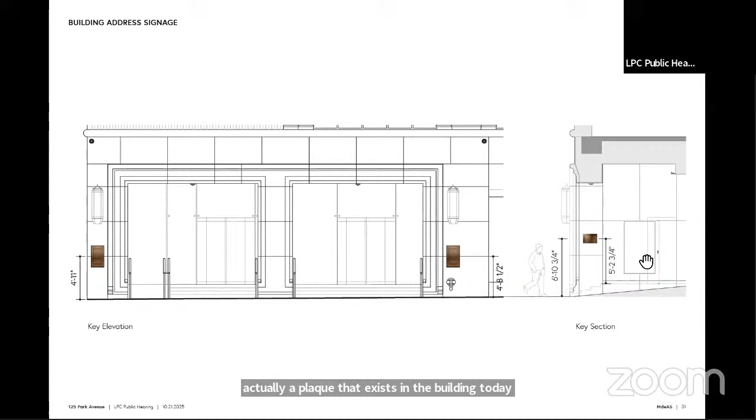First, the building ID sign and ownership sign. The sign on the left is the larger sign that's on the face of the building. The sign on the right is the smaller ownership sign that's on the return side of the jambs. Both signs incorporate a statuary bronze finish, which we found to be historical to the original storefronts in the building, and a simple perimeter frame that gives relief to the adjacent stone.

This is the plaque that exists kind of buried back in the lobby today. It's actually a wonderful summation of some events and structures that were on the site from the Revolutionary War period up to the present day naming of the Pershing Square building. So rather than hidden in the building just for tenants, we're proposing to bring this out towards the public on that east wall along the ramp. This would be embedded flush with the stone walls.

Flush with the stones, and then the wall sconce - this is a contemporary take on what we've been able to pull from historic photos. The wall sconces utilize the statuary bronze material and a fluted glass inlay, providing a very soft glow to mark the entry to the building. This small light on the underside of the sconce itself is actually shining down onto that building address sign, which is immediately below.

And then a few more details. The railings today are just a square profile with painted finish; we're proposing to reinstate a profile and finish that's more appropriate for the era of the building. And then the stair profile we mentioned - today it's 3 very, very steep steps. Again, stretching this out more gradually and introducing a bullnose profile more appropriate to the building. Actually, the Cipriani building next door has a very similar stair at its entry.

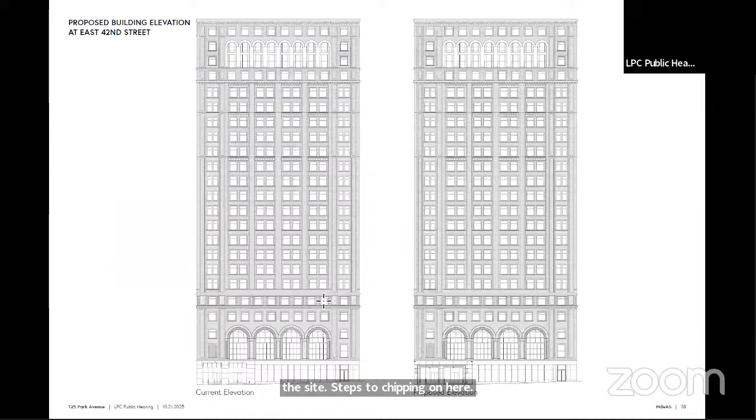And there's an overall building elevation of the existing on the left and the proposed. Again, the double bay marquee here is blocking that granite band that we're proposing to reinstate. Then the proposed with the roll molded perimeter, a blow-up view of that here.

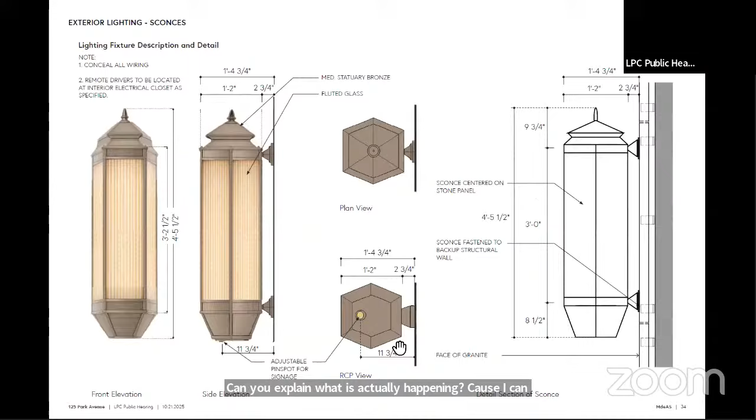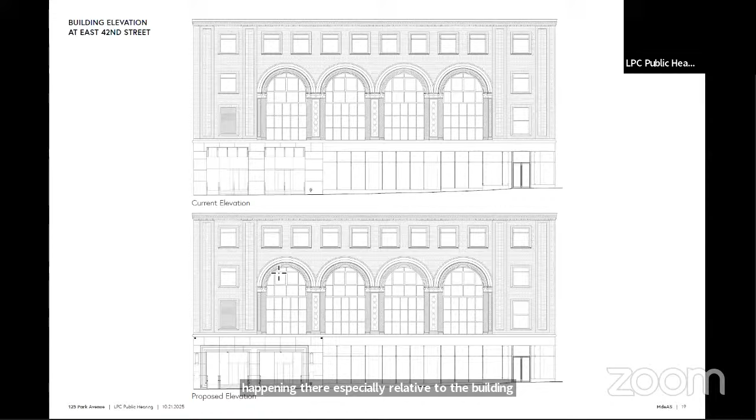Relative to the alignment of the center pier to what's happening above and the width of the two proposed portals, it does look like there's been some change there, which is not necessarily a bad thing from the existing to the proposed. Looks like maybe the center pier actually got smaller, maybe it's justified to the left a little bit more. I was wondering if you could speak for a moment to clarify the alignments happening there, especially relative to the building above and the decision-making that went into those. Hope that was clear, it's a subtlety.

On that intermediate column, the alignment there—today the column inside is not quite centered, so we are trying to reduce that to open up the visibility between there. In the proposed plan, that intermediate column is actually as small as it can be around the actual structural column. The roll molded perimeter had a little bit added to the right side, given this standpipe connection and the column right behind there. We couldn't move all of this given the structure but still wanted this detail, so this grew slightly. In the end, we wanted to make each opening the same size.

We have the 14.9 at both openings there. Got it, very helpful, thank you.

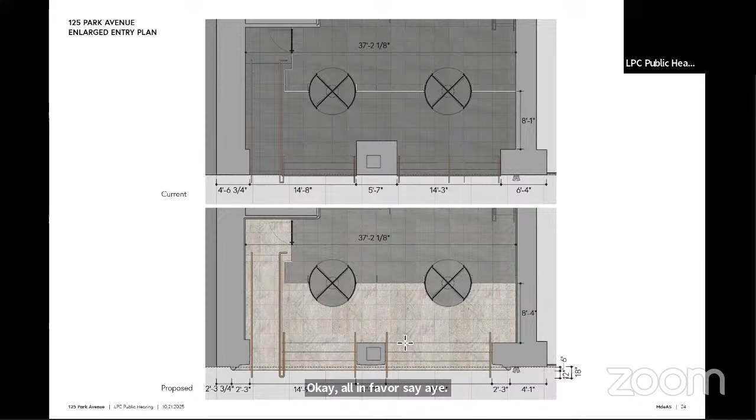Commissioner Ginsberg, would you like to start this discussion? Yes, I can do that. Go back to that last image, because I've been looking at this.

One needs a bigger entrance, needs to keep the handicapped ramp, and then by putting the frame around it, it makes the left side seem a little tighter, even though it's the same dimension because of the frame. But I think that is reasonable. I think the shallower stairs will be appreciated by people coming into the building. The light fixtures are appropriate and tie into what was there originally. So in general, I think this is appropriate and I can approve this.

Thank you, Commissioner Mahan? Yeah, I agree, I appreciate this application quite a bit. I think the proposal is much more nuanced and much more harmonious with the historic building above, which is fantastic, than what is there today. I understand you're trying to navigate some contemporary requirements, but you're certainly bringing it back to something much closer to what it used to be.

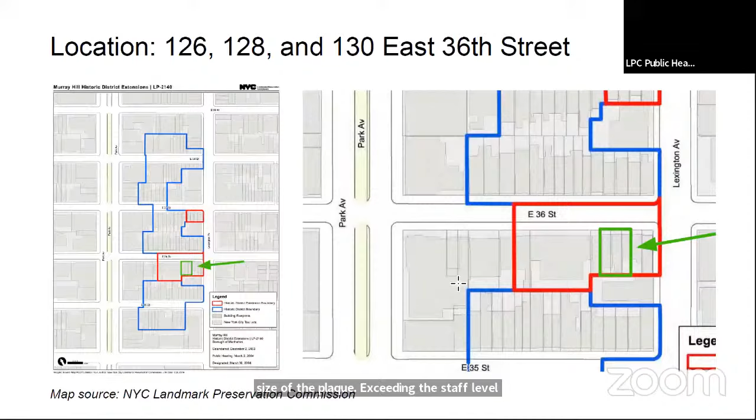So here is our location in the Murray Hill Historic District Extensions. The plaque itself is located by the main entrance to the school in the middle, which over time grew to encompass the 3 adjoining row houses that we see here from 126 to 130 East 36th Street.

Here's a view of the plaque in relation to the main door, and you can see that the building is set back about 15 feet from the sidewalk. Here are the dimensions of the plaque. Again, as I noted, staff level rules at a small building, it's 2 square feet, so at just over 6 square feet, it's outside of the staff level.

Here's the plaque in comparison to the materials palette at the building. And for context, as you'd be walking through the historic district, here's additional signage found throughout. Just nearby, there's additional similar signage at individual landmarks, and also very large signage nearby. The applicant, Tara Greenwood, is with us here today to answer any questions.

This is just some examples of what this sign represents to our neighborhood. We were founded in 2004, so we've been there for 22 years, expanding across 3 townhouses. This is our main entrance point, so that's where all the kiddos come, take their pictures on their first day, their last day. I've had the privilege of taking pictures of kids that have graduated from WeOnes coming back to take pictures with me when they get into college. It means a lot to us in the community, and it sort of roots what we represent. We hope we get to keep it.

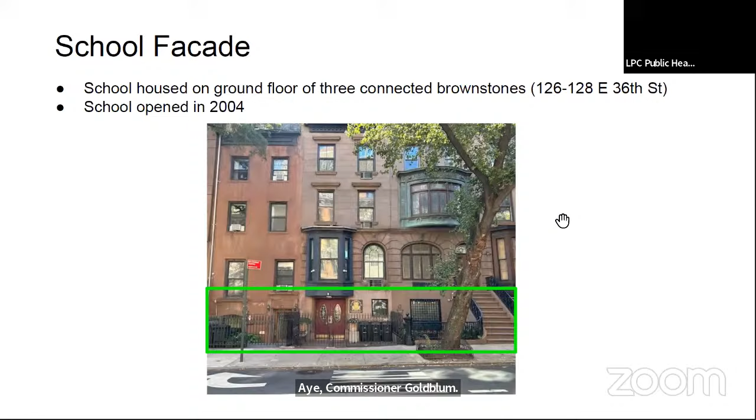Thank you. Commissioner Kimbe, would you second that motion? Second. Okay, thank you. Mark, will you call the vote? Vice Chair Master, Aye. Commissioner Chen, Commissioner Chu, Aye. Commissioner Ginsberg, Aye. Commissioner Goldblum, Commissioner Quimby, Aye. Commissioner Jefferson, Aye. Commissioner Mann, Aye. Commissioner Wilder. Aye. With 9 in favor and none opposed, the motion passes.

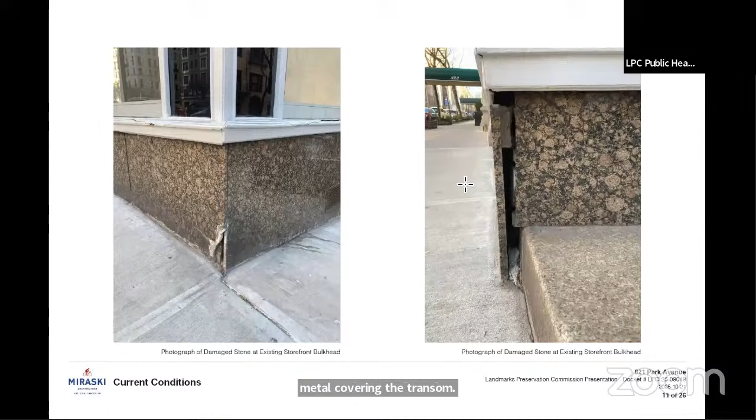Here's some close-up photos. We did do some probes to investigate the material. We don't believe that this is the historic material, and it doesn't look like there was any wood framing behind the stone bulkhead. Up at the transom, there is no glass present behind the sheet metal that was removed at one point, unknown date. These are just some photos showing the location of those photos. We did also probe on the interior to try to delaminate the gypsum board to see if the glass was there. It is not. And this is the proposal.

On the left is the current condition. On the right is the proposed condition. We're going to repair, scrape, prime, and paint the wood paneling at the top and the metal cornice, and then propose a new fluted glass transom that is going to be opaque.

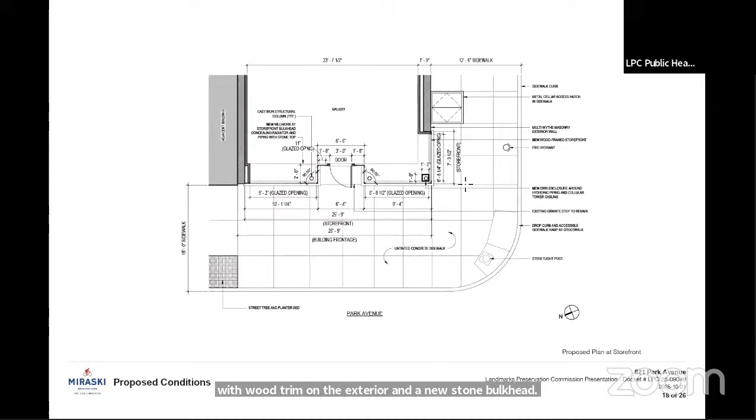This is an art gallery. They do not want the glass to be fully transparent, so we are going to do a gypsum board wall on the interior side, and then a new wood framed storefront with wood trim on the exterior and a new stone bulkhead. Part of the proposal is to reconfigure the entrance to the storefront, as you can see here.

And then this is the existing elevations, and then the proposed elevations. So we're maintaining the proportions of the framing, introducing that new fluted glass transom, and then some repainting and repair work to the existing materials above. Here are some just close-up photos of the existing elevation and sections to give you an idea. We're maintaining those proportions.

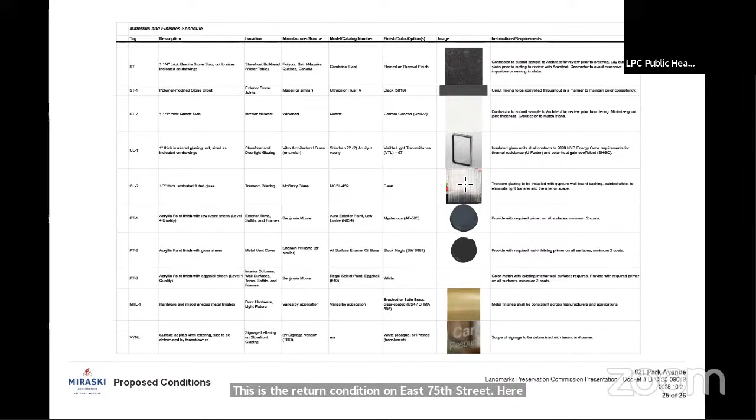And then this is the before and after. This is the return condition on East 75th Street. Here is the material palette. We're proposing a dark granite stone, similar stone to what is there, in a little bit more of a rough texture. The current stone is polished. Mortar joints and the paint colors are going to be of a similar color, so it's a darker storefront condition versus the white that we have now. And this is the proposed condition.

So any questions? Happy to answer them. Yeah, commissioners, does anybody have any questions?

Commissioner Goldblum: Yeah, the staff notes that they're suggesting that the frieze above the cornice be painted to match the brownstone. Help me understand where that comment comes from. I think in reviewing the tax photo in particular, that portion of the storefront has a notably paler color. It seems to be in tonality with the brownstone elements. Thanks.

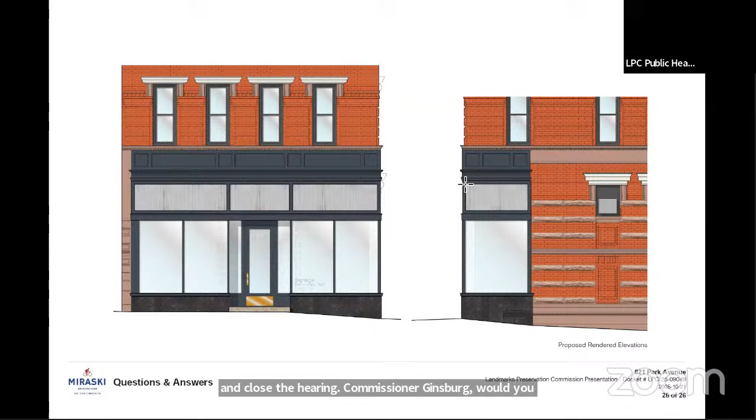Commissioner Kimbe, would you like to start this discussion? Sure. Overall, I find what's being proposed to be very simple, very elegant, very straightforward. I don't have an issue with the change in the materials. There's not much more I have to say. I find it appropriate. Thank you.

Commissioner Jefferson? I find it appropriate. Thank you. Commissioner Goldblum? Agreed. They might explore the paint color for the frieze with staff, but I don't think I'd make that a condition. Thank you. Commissioner Chen? Yeah, same here. Okay, Commissioner Mahan? I think it looks sensitive and improvement over what's there. I'm personally okay with the paint color as proposed.

The frieze doesn't align with the brownstone around the corner anyway, so it doesn't suggest to me, despite the historic tax photo, kind of continuation. So I'd be okay with it as is. Okay, Commissioner Ginsberg? Agreed, appropriate. Okay, and Commissioner Wilder? Appropriate. Okay, Commissioner Ikumbe, would you mind reading that motion in, and with appropriate as is? Thank you.

In the matter of LPC 25-08049, 821 Park Avenue, Upper East Side Historic District, a neo-Renaissance style flats building built in 1890. Application is replace storefront infill. I note that the building style, scale, materials, and details are among the features that contribute to the special architectural and historic character of the Upper East Side District. I recommend that the proposed work will not damage or eliminate any significant architectural features, that the proposed storefront infill will match the historic infill in terms of basic composition of elements, overall proportions, and predominance of glazing, that the replacement in kind of the historic wood storefront framing is warranted by its deteriorated condition.

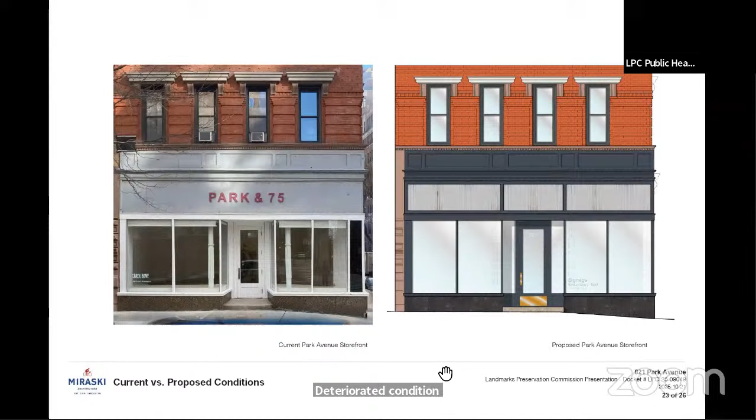That the existing stone bulkhead cladding is simply designed and likely a modern replacement. That the proposed black granite cladding with a flame finish will match the historic bulkhead cladding in terms of material and will be a typical dark color that will harmonize with the overall storefront. That the removal of the non-original opaque panels at the corner of the storefront with shield views on an interior column will not eliminate any significant architectural features, and that proposed fluted glass transoms will recall the historic prism glass that was removed prior to designation in a contemporary way.